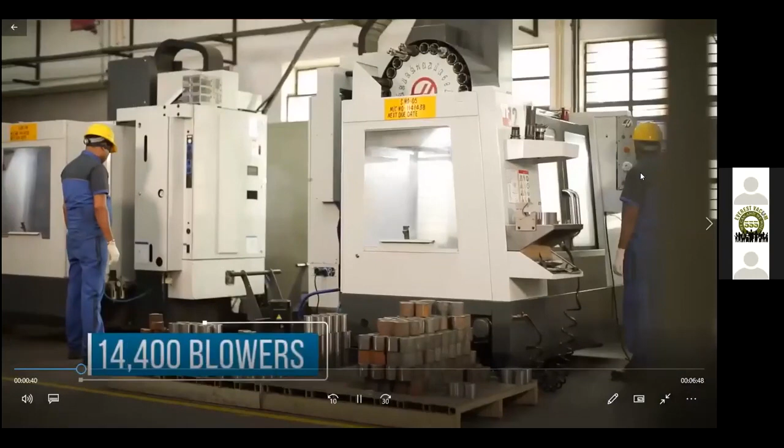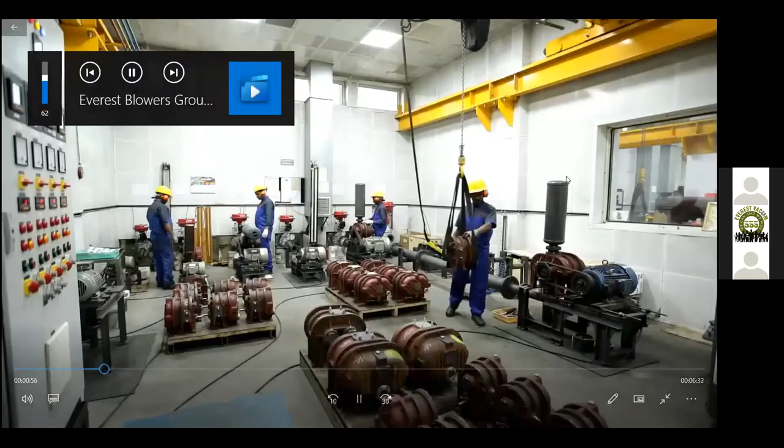This is the pressure division, ready to meet the future demands of twin-lobe, tri-lobe and turbo blowers globally. It is the largest manufacturer of roots blowers in the country and among the big names in all of Southeast Asia, providing a solution-oriented approach.

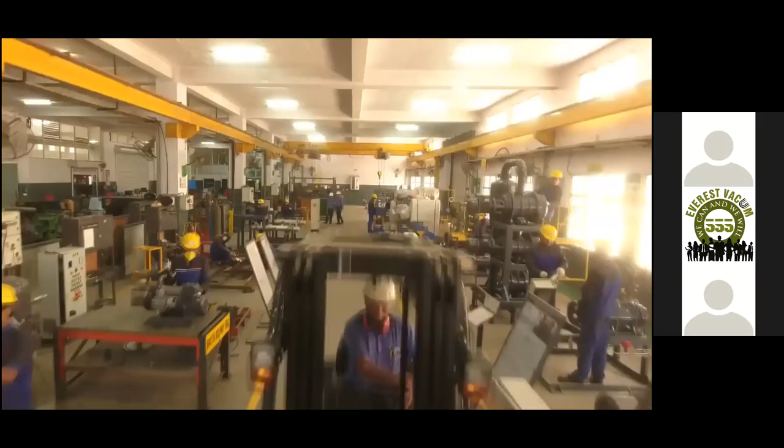In close vicinity is another facility with 150 plus employees. The vacuum division is the new and fast-growing company, the first and only Indian company to have successfully manufactured dry screw vacuum pumps in-house.

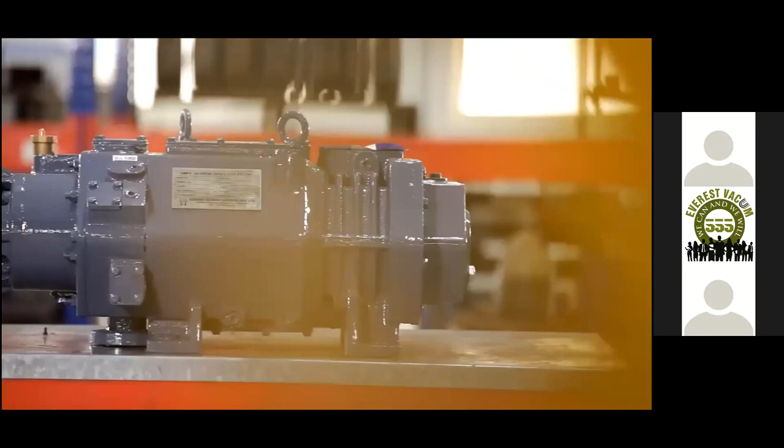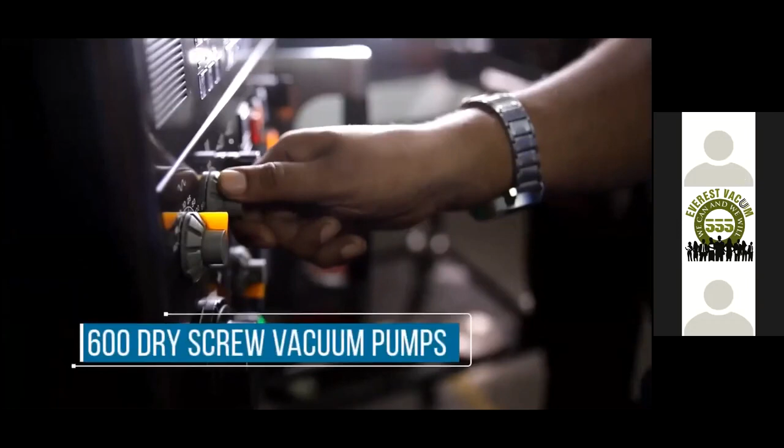Saluting the Make in India initiative, it has a current installed capacity to manufacture over 600 dry screw pumps per year with state-of-the-art, best-in-class mother machinery. Both these companies combine to form the Everest Group, a name synonymous with the world's highest mountain, the Mount Everest.

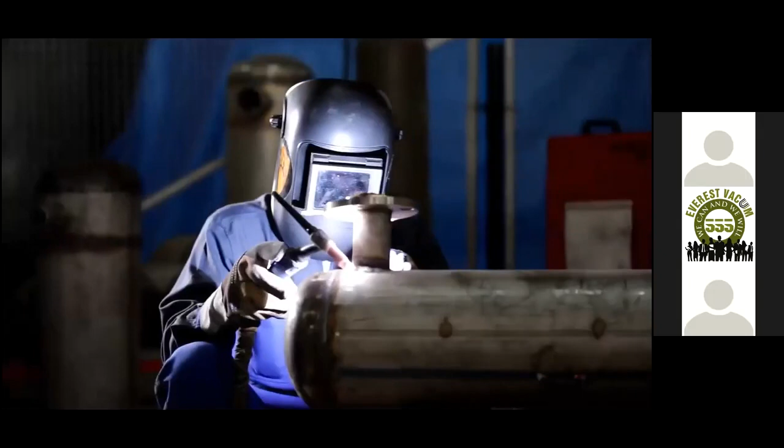Not just the same name, Everest Group has the same values too: to set benchmarks of performance, provide value for our customers, and to become the top solution provider of pressure and vacuum systems in Asia.

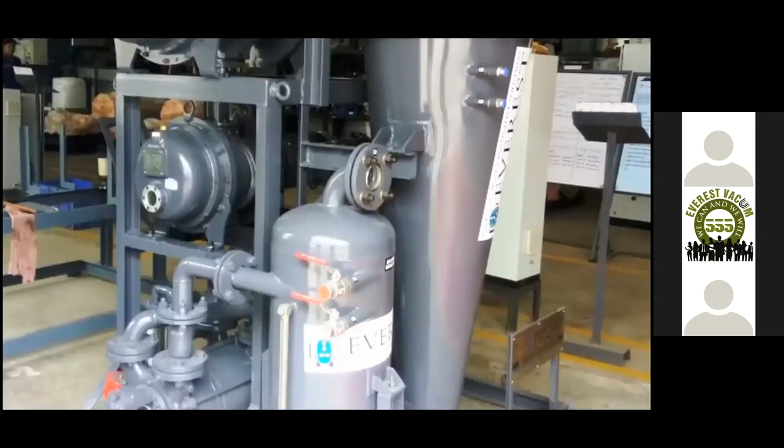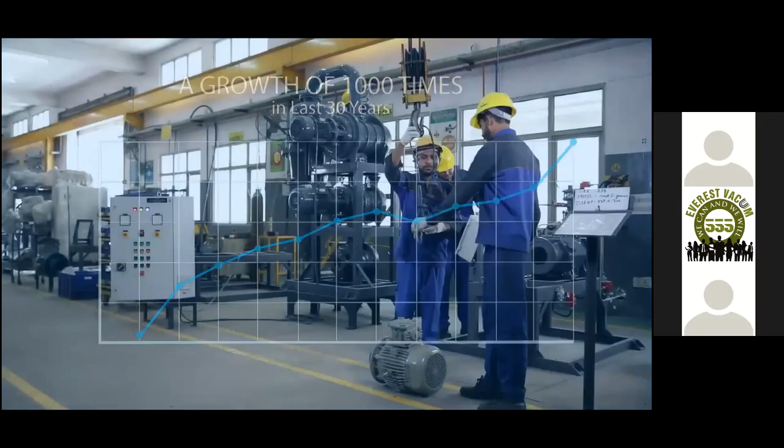The Everest Blowers Group, with its two divisions, has been scaling heights ever since its inception, becoming the largest blower and vacuum pump company in India. Since the early days, the Everest Blowers Group has been standing tall, towering above all other manufacturers of high-quality equipment in India.

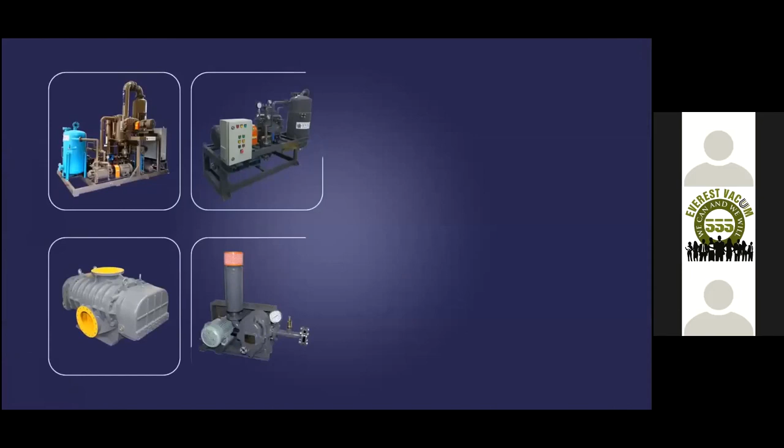For me, it's a business I've been doing for the last 38 years. I belong to a service background, with my father being a government lawyer. As an engineer by qualification and years of experience, today I am proud to steer one of the fastest growing high-tech manufacturing companies of the country.

I was fortunate to have hands-on experience in every department, from design to production, to sales and marketing, having sufficient exposure which has been used constructively towards the growth of the company. Supported by a pool of young talented Indians, we have always focused on a solution-oriented approach and application engineering, creating new markets for our product. This has given us an edge over competition.

Current economic indicators project a very encouraging image of India as a robust, fast-growing economy with least risks. The world is bullish on India, and so am I, on the growth of Everest. We have a strong succession plan with a highly competent second generation to carry on the mantle of Everest's growth and legacy. We wish them all the success.

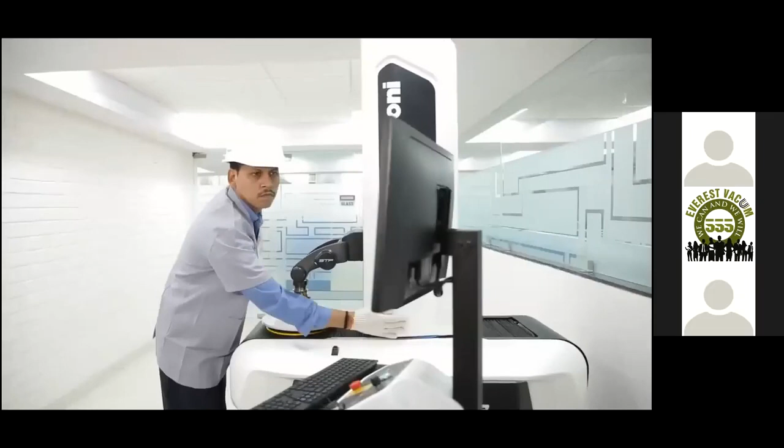Under the Everest Blowers Group umbrella, many world-class products are manufactured in both the pressure and vacuum divisions. In 1998, Everest Blowers Group went on to get its first ISO certification and also crossed international borders by exporting the products overseas. Over the years, Everest Blowers Group has made sure that it has abided by all industry norms through various certifications.

The Everest Blowers Group has been associated with many different industrial giants from different verticals, bagging prestigious orders from them. An innovative thinking and approach has made the company excel in many first-time achievements.

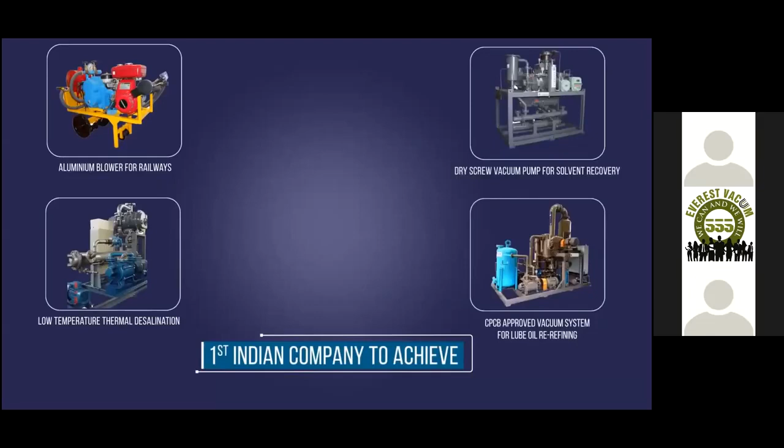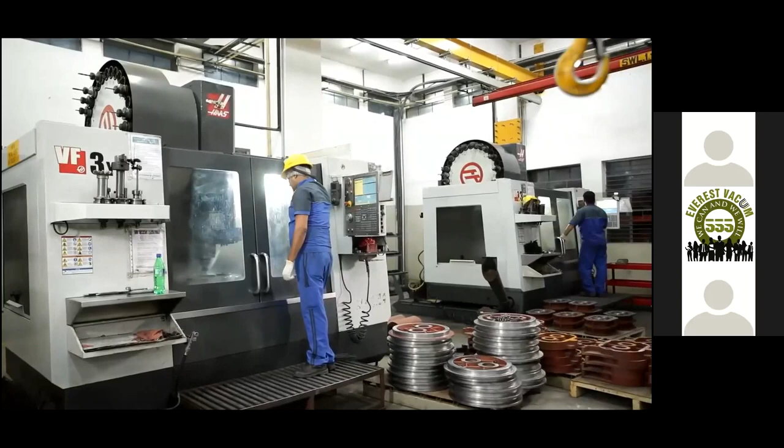Everest installed their first CNC machine in the mid-2000s and since then has increased the number of equipments to cater to the growing demand of the market. Everest started manufacturing their range of tri-lobe blowers as a more efficient alternative for reduction in noise and vibrations.

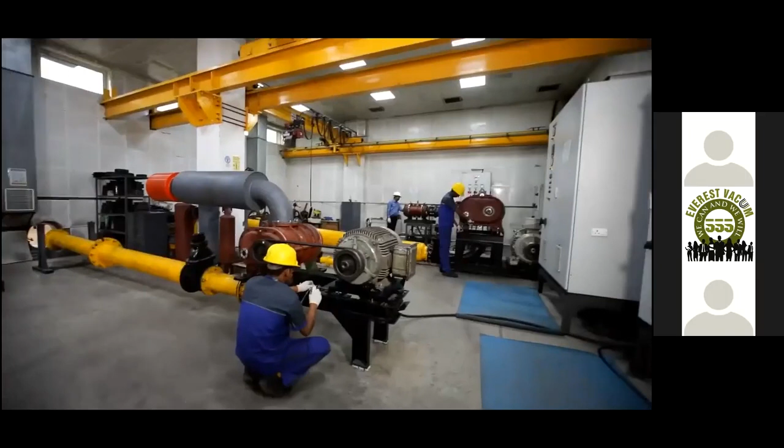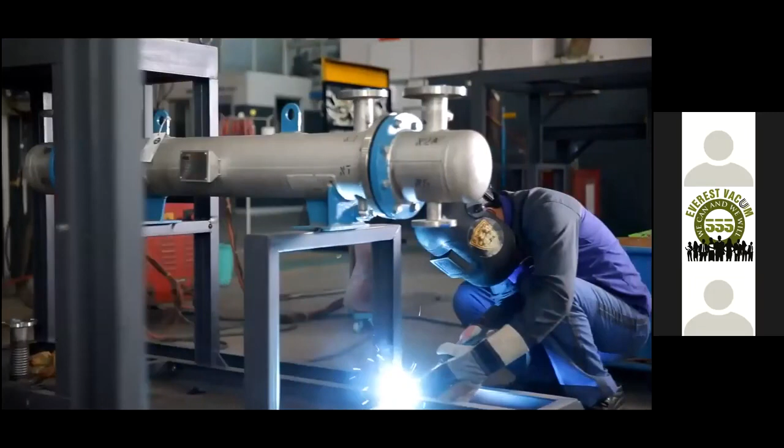The group has received accolades and admiration in recent years, touching the sky. The vacuum systems facility also started a dedicated unit to cater to the needs of complete skid-mounted systems requirements of our customers.

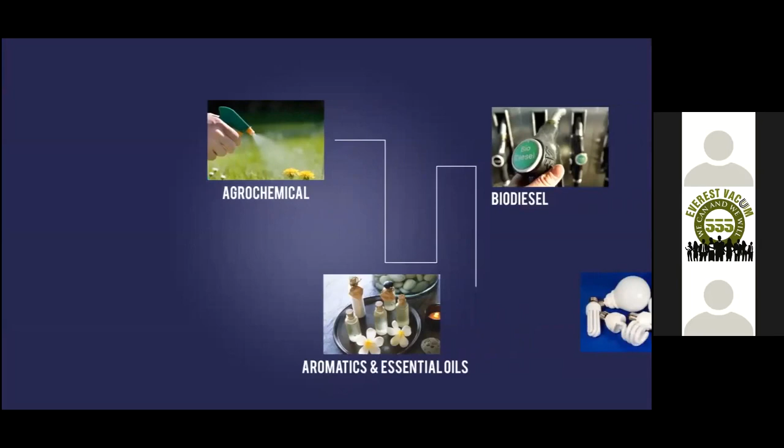The vacuum division is currently manufacturing around 350 to 400 complete skid-mounted vacuum systems annually, with a very wide industrial base spread across various applications.

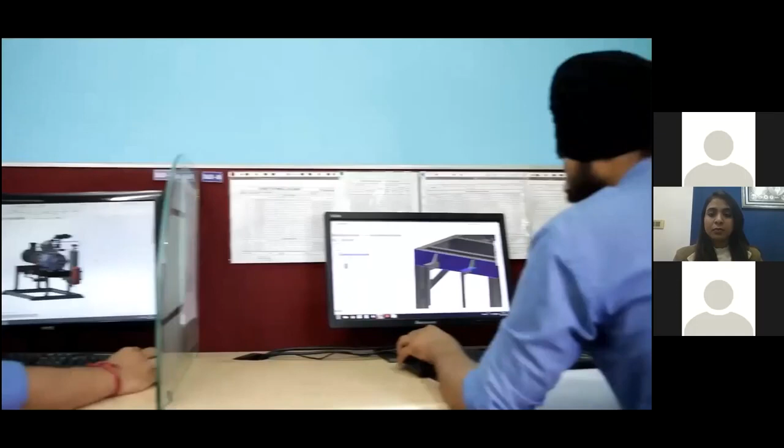The Everest Blowers Group is proud of its journey in scaling new heights and is in pursuit of excellence. We are following the latest industrial practices of Kaizen, 5S, and other lean manufacturing techniques.

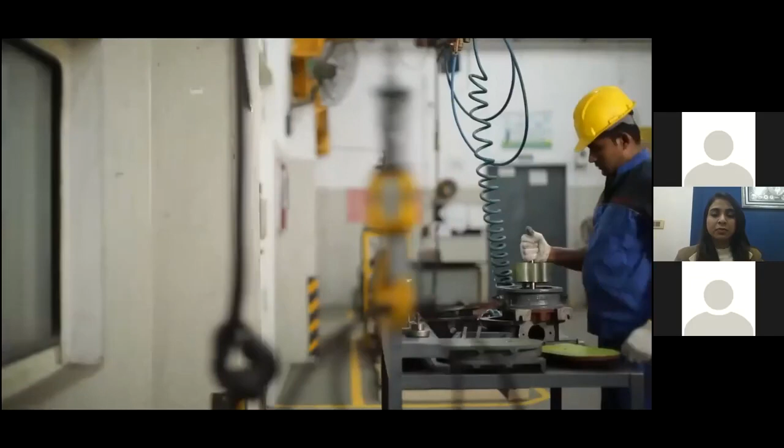To always remain connected with our stakeholders, we are available on all the leading digital platforms and have an online complaint portal, technical manuals, and a vacuum calculator.

It's been a little over 8 years since I've joined our family business, and we've experienced good growth with some diversification. I really enjoy what I do, as every day is a new learning of something interesting, helping us serve our customers better. So at Everest, we believe in very strong fundamentals of quality and innovation.

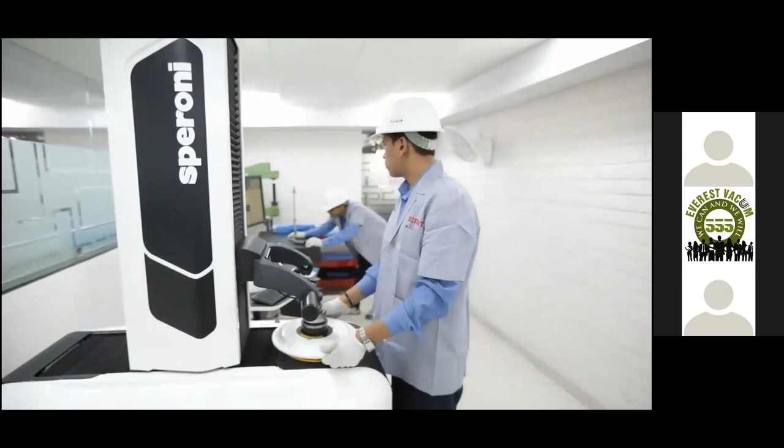We are the first and only company in India to have manufactured dry screw vacuum pumps, mechanical vapor recompressors, amongst many other products.

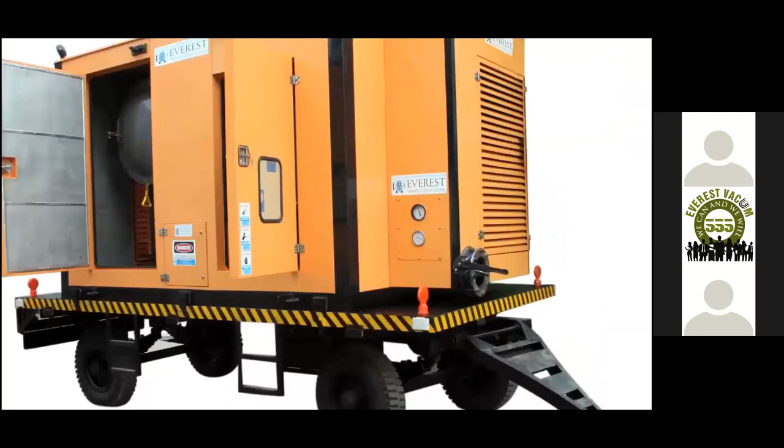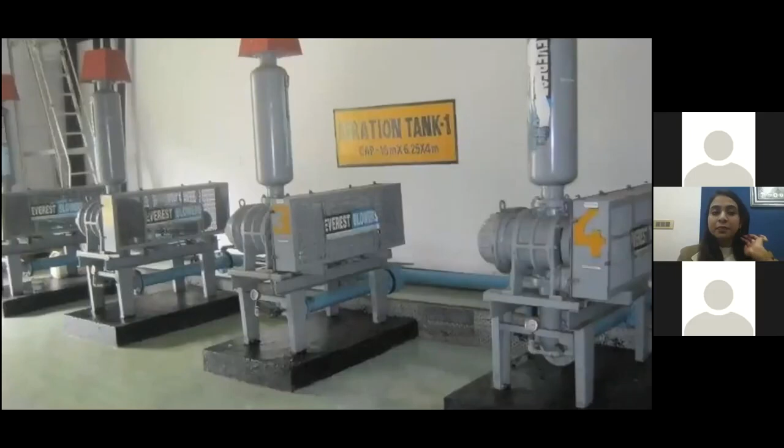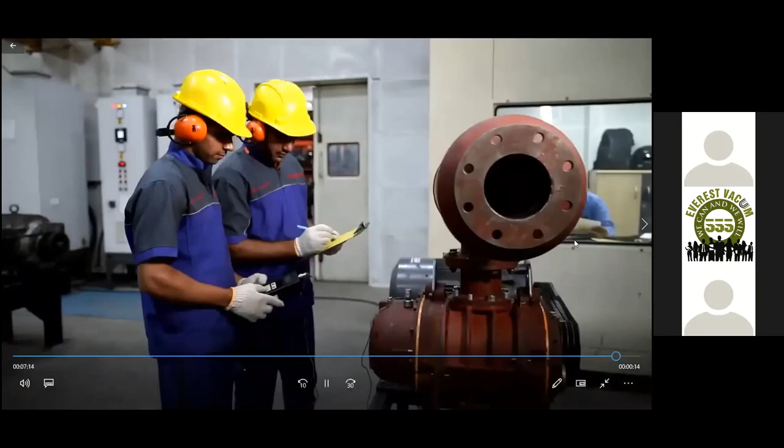With presence in the Indian market for over 3 decades and more than 150,000 equipments successfully installed, running in 38 countries worldwide, we are a trusted brand. Our vision is to further build and sustain a positive relationship with our customers, to have an innovative and motivated work environment, and to ensure a bright future for all our stakeholders. The Everest Blowers Group, standing tall like Mount Everest, reaching for the sky, now and forever.

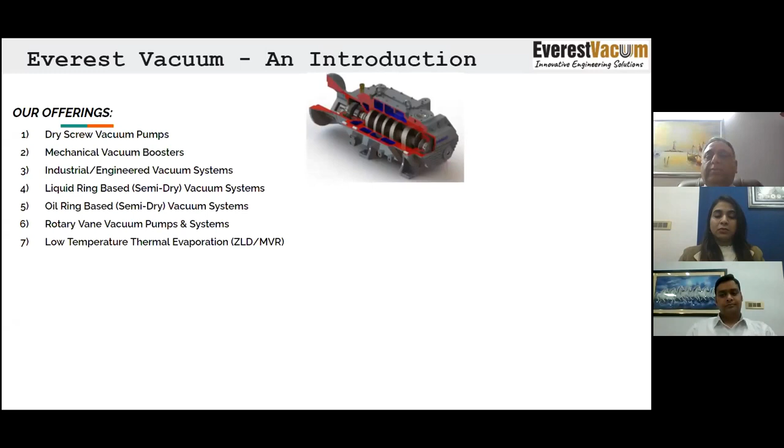Our promise to our customers is to ensure that we provide clean, reliable and sustainable vacuum, improve product yield through deeper and consistent vacuum, cost and space saving by right sizing, reduce batch cycle times, and in turn provide our customers with reduced operational costs.

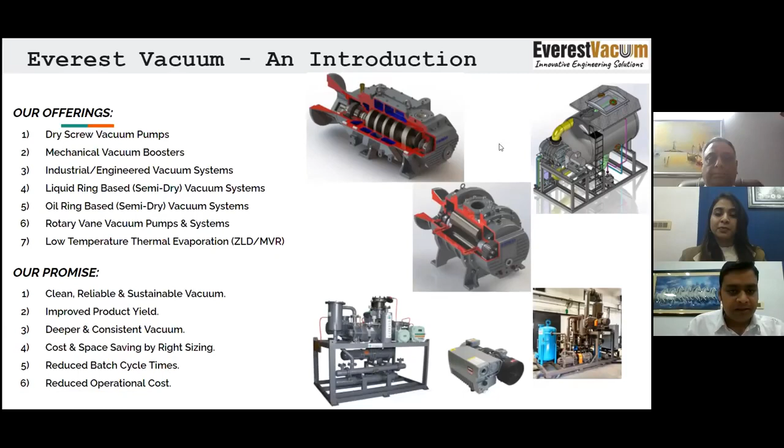So today's topic, as Chetna described, is high vacuum pumps for waste oil or used oil recycling process. As we are all familiar, waste oil is oil which has lost its properties as a result of use in motors, vehicles, electrical industry, chemical industries or process industries, wherever we are using them, and impurities get mixed with them like dirt, metal scrapings, water, or chemicals. This makes the oil lose its properties, and it is of no use until it has been recycled. So this oil has to be replaced with clean oil to complete the job.

So what is used oil? Examples of used oil include used motor oil, used hydraulic fluid, electrical insulating oil, transmission fluids, compressor oils, and cutting oils, which we regularly use in our day-to-day life. Most vehicles need lubrication for proper functioning and smooth operation, but this keeps depleting over a period of time and we need to replace it. So wherever this oil goes, we need to recycle it to make it fit for reuse.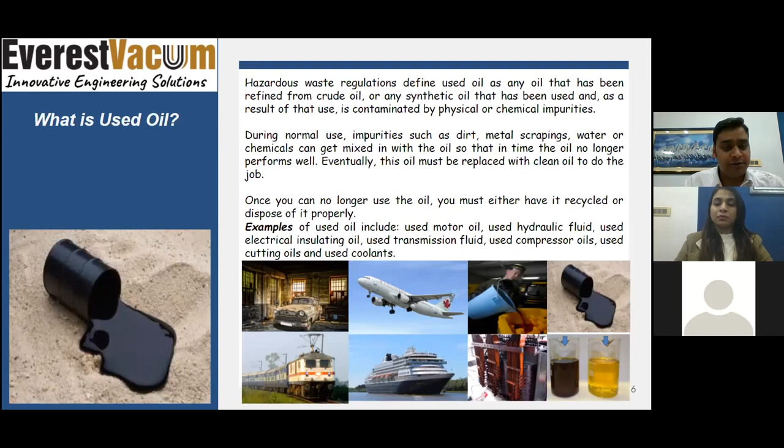So there are types of vacuum distillation we will discuss. There are two types: one is batch distillation, or direct distillation, and another is a continuous process performed with wiped film distillation method and thin film distillation method.

As most of us are familiar and already doing these processes at our premises, direct distillation is a process where we feed in the complete batch and then take out fractions from the waste oil. The fractions majorly include water, diesel, light lube and heavy lube. The remaining balance at the bottom is used, I think, for road making, as a bitumen component. So majorly people are doing it like this.

In batch distillation, you have limitations of heating, basically concentrated onto a particular section where it's not evenly distributed, which leads to extensive hydrocarbon cracking in the waste oil. This hydrocarbon cracking may lead to pollutants and gas generation escaping to the environment, which can create a pungent smell around the plant.

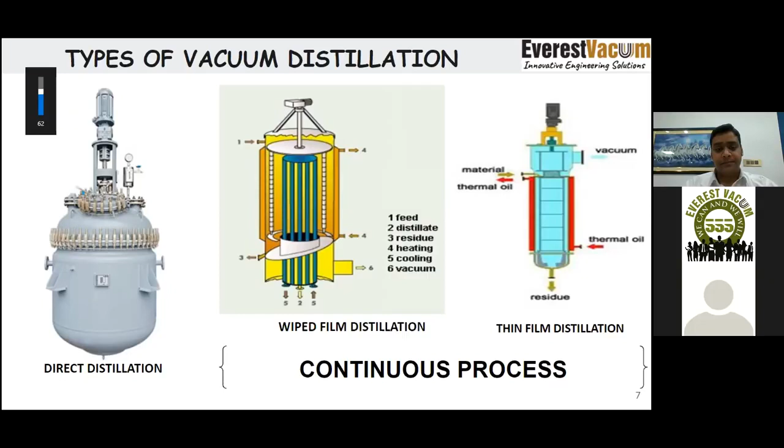The receiver, the process, the entire process - this is what we call the system volume - is connected to a vacuum pumping system, which helps in achieving the desired vacuum levels based on the process needs. We will elaborate more on the vacuum system in the coming slide.

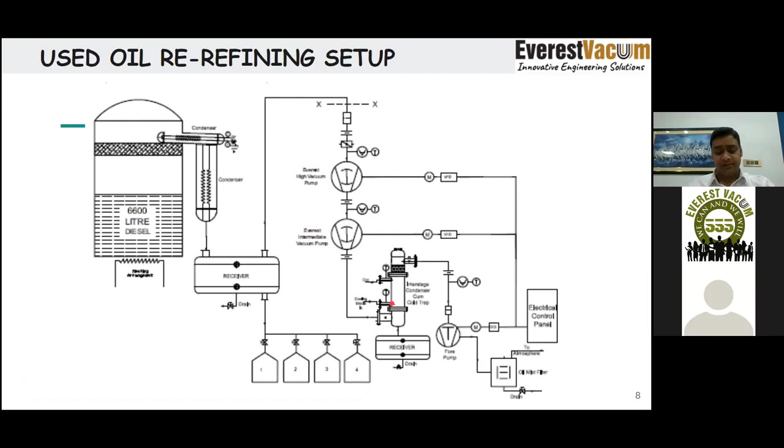So what is the role of the vacuum pumping system in re-refining? It helps you achieve a higher vacuum level, that is less than 1 torr absolute. It's a continuous duty operation. This vacuum helps in reducing the process temperatures in the range of 260 to 310 degrees Celsius.

In earlier days, people were distilling this waste oil under high temperatures, which led to charring in the waste oil, causing more hydrocarbon cracking and generation of effluents into the environment. By eliminating all these issues, we have reduced the process temperatures, increasing the quality of the product.

This reduced pressure, reduced temperature, high vacuum in the process, and also the correct sizing of the system help you achieve the desired batch time. So the process time has come down to between 6 to 8 hours from 12 hours. Now you can have an additional batch in a day.

These systems ensure 99% recovery due to the high vacuum, lower temperature, and the best evacuation that you are doing. So it gives you an ensured 99% product recovery.

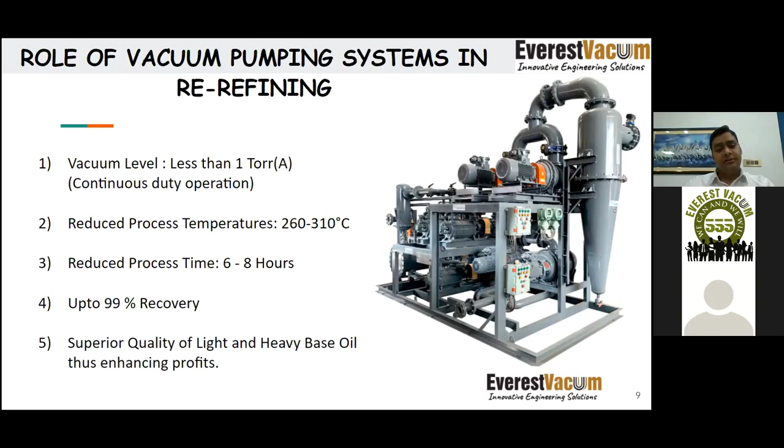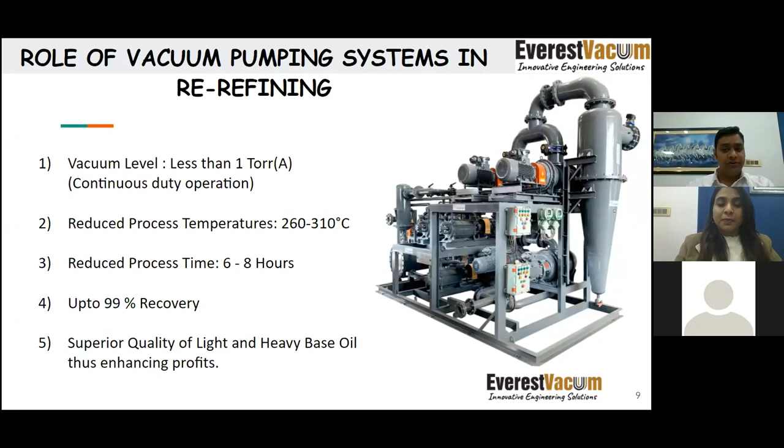With the vacuum, when temperatures are under control, you get to evaporate the light lube and heavy lube at a lesser temperature, which actually increases your production plus the quality of the oil, that is the color. So when you get a good color, the market price is obviously better as compared to any other manufacturer or refiner.

High vacuum pumping system - we'll take you through an introduction of what kind of systems we are offering and how they can be beneficial. Everest has its own milestone product called OilSyst. So on the left hand side, if you can see the system, we call this the OilSyst vacuum pumping system, a high vacuum pumping system.

As you can see, the pumps are coupled with mechanical vacuum boosters, a cyclone separator, and various other accessories in line for the process requirement. You can have 2 or 3 boosters based on the process speed or evaporation rate, which will help you re-refine in lesser time and handle heavy process carryovers.

The pumps usually have good sealing structures. We use mechanical seals which help prevent the flow of unwanted vapors into the pump or into the lubrication side, preventing issues and ensuring a longer life of the pump.

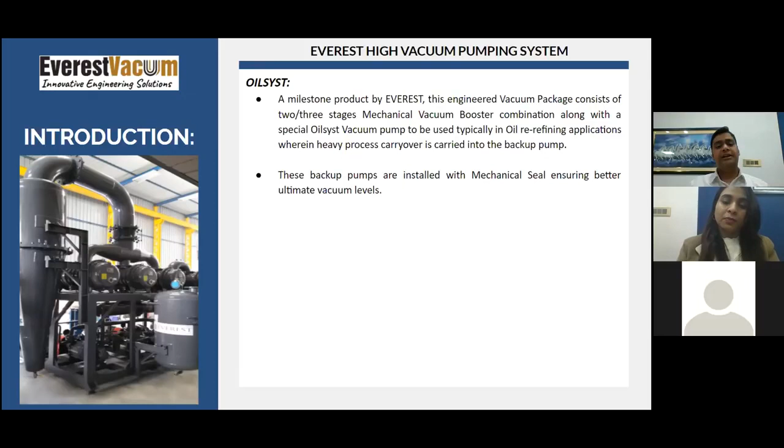The system, as I have indicated, includes the cyclone separator. Its purpose is to control carryovers inside the pumps and stop foreign particles from moving through, because waste oil includes a lot of impurities as we have indicated earlier. It can have metal scraps, cloths, threads, and various other things which need to be stopped before a vacuum pump. We also have an inline filter and a condenser to stop carryovers escaping from the pre-condensers or partial condensers, to improve pump efficiency, since during compression we need to maintain some clearances. So to not obstruct the operation of the machine, we use these filters and traps.

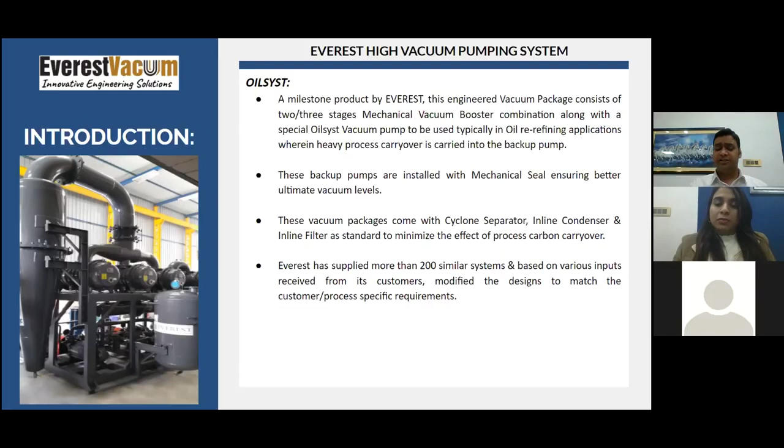Everest already has a wide range of suppliers all across the globe. We currently have more than 200 machines running worldwide. Majorly, we have market share in Africa, Middle East, and South America. We have very good customers working efficiently and enjoying the benefits in their processes with the quality oil they are getting.

With all these things, Everest vacuum systems are amongst the most technologically advanced iteration of the product available in the market. Our engineering team continuously benchmarks it against the competition and customer complaints to further iterate and improve on the design.

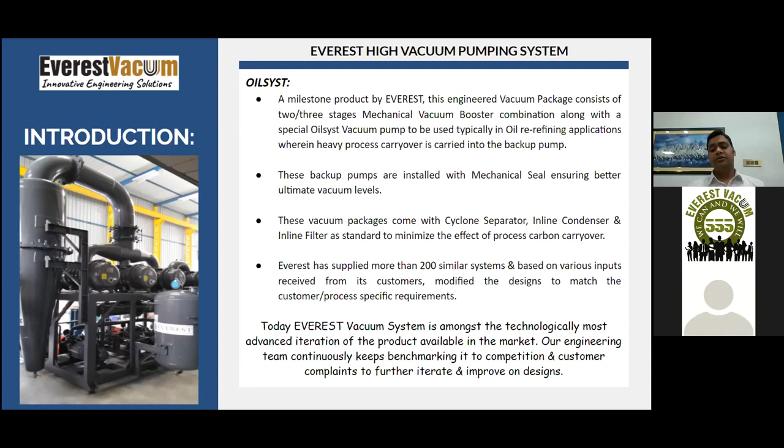Why use an Oilsyst? You are all aware of various kinds of vacuum pumps available in the market - oil ring vacuum pumps, liquid ring vacuum pumps, dry vane pumps, dry screw vacuum pumps. So why do we typically emphasize Oilsyst vacuum pumps? There are various benefits associated with Oilsyst vacuum pumps. First and foremost, they are easy to maintain and operate.

The systems are standard and optimized as per customer use, completely skid mounted, ready-to-use packages with all the safety interlocks we are offering. We have a dedicated and specially designed control panel to operate all these pumps, which can either be mounted on the skid, as you can see in the photograph, or connected in your panel room through a wire.

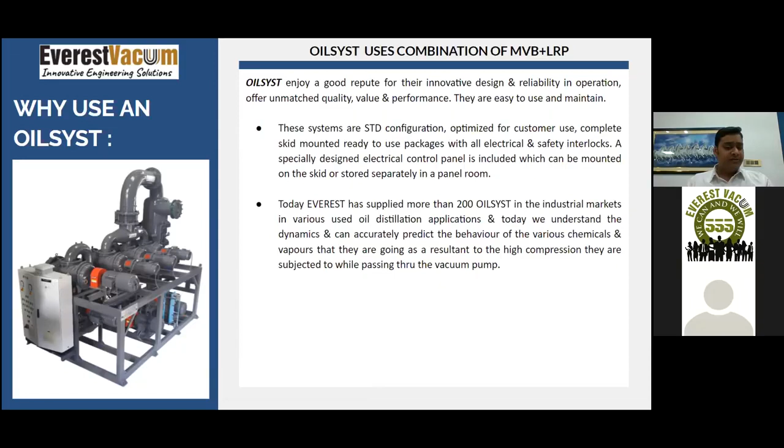We have already given 200 pumps as indicated, and this is not specific to the waste oil re-refining market. This includes all food processing industries where we have different media inside the pump based on the requirement of the industry. So these pumps are quite efficient in terms of offering vacuum. With these systems, we go up to a vacuum level of 0.5 torr absolute under blank conditions.

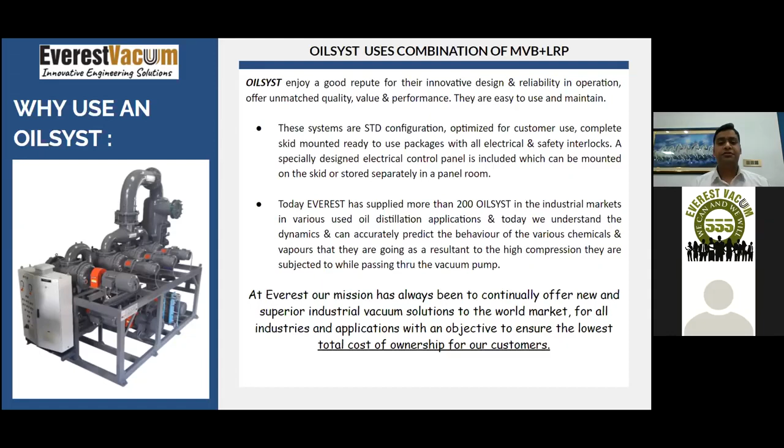As explained by Mr. Rakesh, our mission has always been to continually offer new and superior industrial solutions to the world market for industries and applications, with an objective to ensure the lowest total cost of ownership for our customers. At Everest, we are not only offering you a system, but also providing you solutions. Our aim is to understand and analyze your processes so we can provide you with the correct improvements and resolutions with our machines.

These pumps, as explained, are Oilsyst vacuum pumps being circulated with oil. The oil can be your base oil as well. This is the major advantage - whatever you are refining is actually offering you a benefit in operations by utilizing your own source that you are creating.

We have very good limited controlled power connections with our systems. We utilize the efficiency to the fullest. We follow engineering practices and operate under permissible RPMs and frequency of the site.

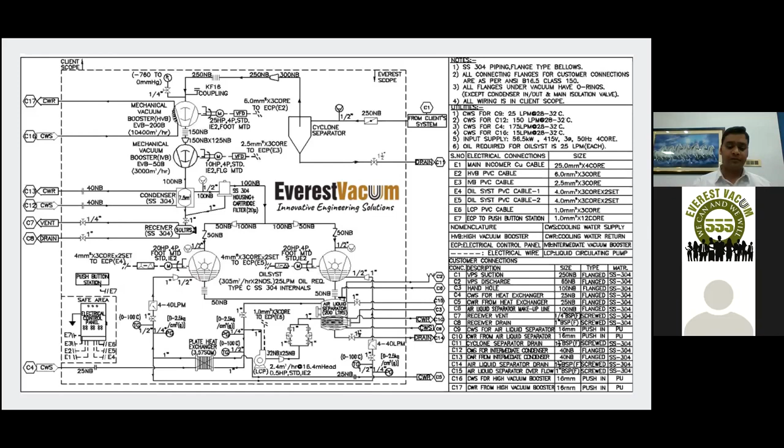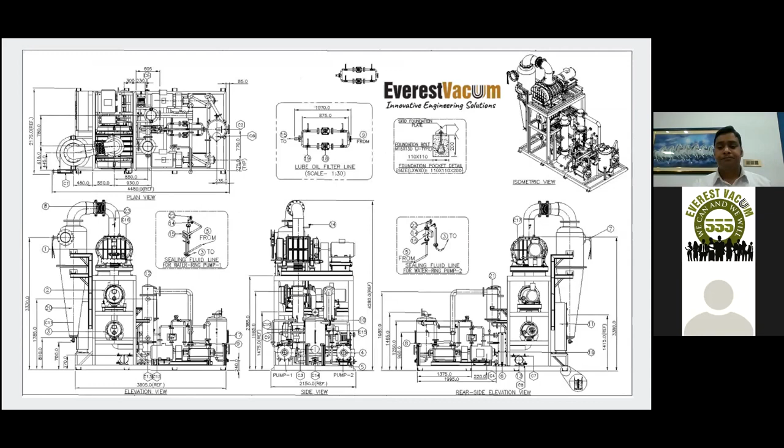As we keep on going, the evaporation of water mixed with diesel starts at around 160 to 180 degrees Celsius. This is the lightest portion and the lowest boiling product in your waste oil, which starts getting evaporated at a considerably low temperature compared to previous atmospheric conditions.

You also get a good recovery of approximately 12% diesel, in the range of 180 to 215 degrees Celsius under operation. So your diesel comes out early, which helps you in maintaining the quality of your light lube and heavy lube. Because if the diesel doesn't come out completely, the light lube cannot be separated out of it.

So you go on to the light lube section at a temperature of 215 to 265 degrees centigrade. This is the major advantage where you earn major benefits, because if this section gets completed early, the most expensive and best part - the heavy lube - comes out, which we are actually completing below 300 degrees centigrade.

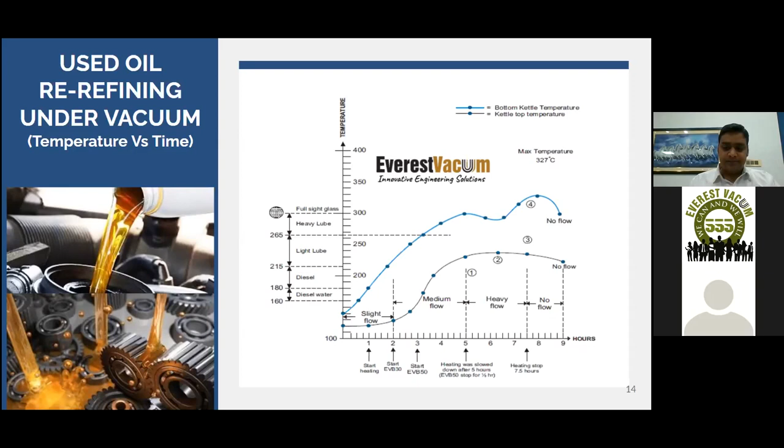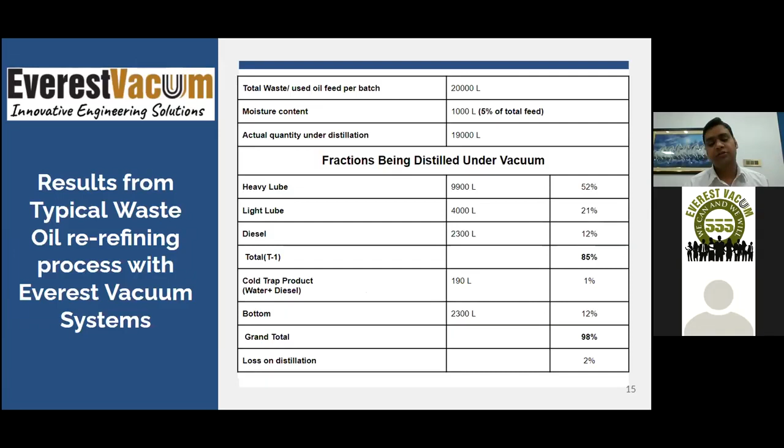The results from a typical waste oil re-refining process with Everest vacuum system. Now we will take you through a typical example of a refinery where the practical study has been made with our vacuum systems. This table shows how much feed per batch we have taken - it is 20 KL, 20,000 liters.

The moisture content present in the total feed, we count as 5% usually. So the total actual quantity coming under distillation is 19 kL, 19,000 liters. The fractions being distilled under vacuum: heavy lube is almost 52%, equal to 9,900 liters; light lube, 4,000 liters, balancing out to 21% of the total feed under distillation; and diesel, 12%, coming out to 2,300 liters.

In case you have any other fuel component in the waste oil, that can be treated under this table, but the percentage will remain and vary between 12 to 14%.

So the total is approximately 85% of the major fractions of the waste oil. Now, regarding the trap, what we offer is an interstage condenser and trapping unit. What you get out of it is water plus diesel, which is almost 1% of the total product that you're processing under distillation.

Obviously, the process of waste oil includes the bottom coming up. There will always be some residue remaining. What we observed is 12% will come out as bottom, that is 2,300 liters, equal to the quantity of diesel. This bottom is used in various road making activities, in charcoal or bitumen manufacturing, and as a building substitute in some countries. People also use it for fixing and sealing in industries and household projects.

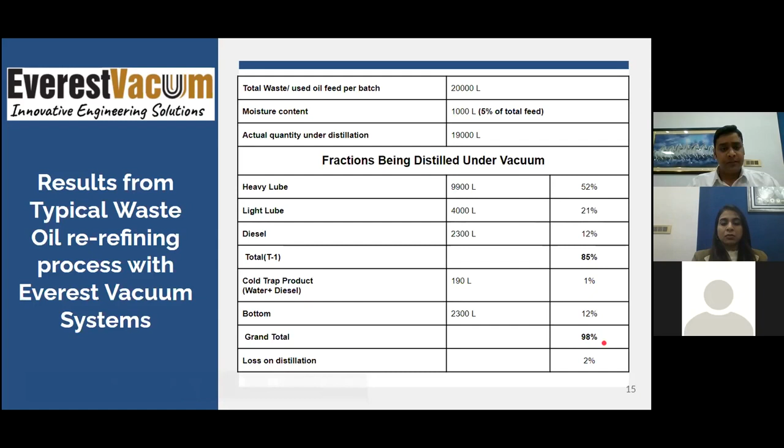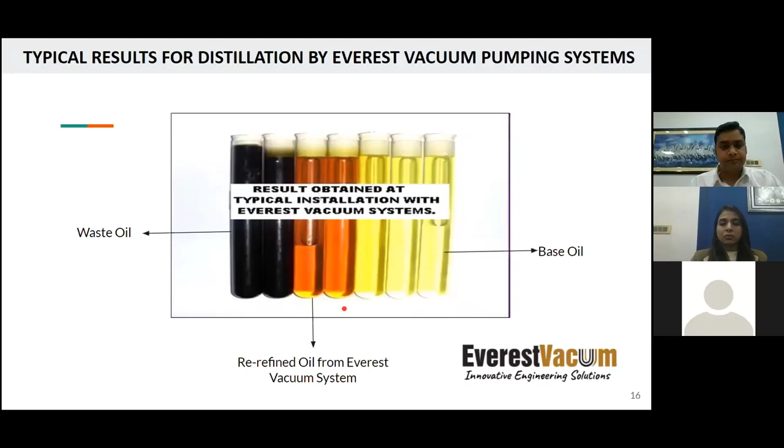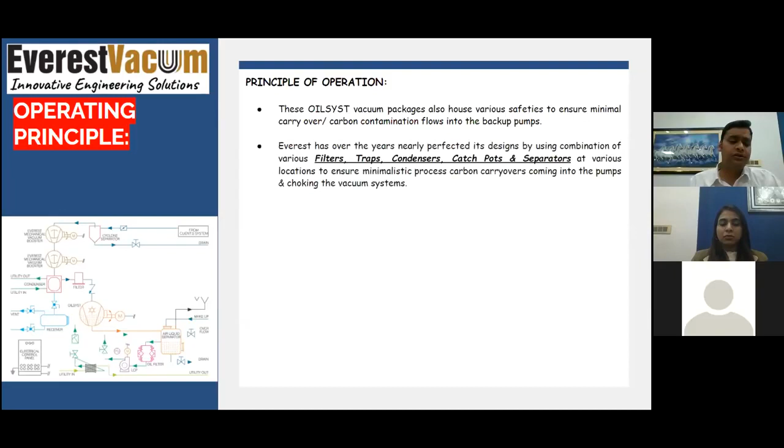Taking you to the operating principle of the vacuum system, we offer these systems with various safety interlocks. We have control on carbon carryover of vapors into the process or the vacuum pumps. With this, we offer various filter traps, condensers, catch pots, and separators, as we've explained. We have various safety provisions and interlocks into the systems, leading to better efficiency of the vacuum pumps in the process.

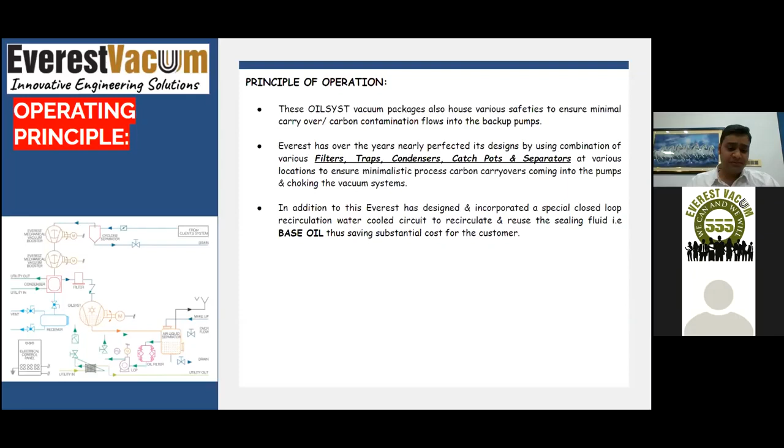In addition, we have designed and incorporated a special closed loop system. As I told you, the sealant fluid inside the liquid ring pump is used, recycled, and reutilized back into the pump to a certain limit. The main advantage is recirculation, a water cooled circuit, and reused sealing fluid, which is the base oil. Whatever circuit you have, you can use sealant fluid as your refined base oil. So it's a continual cycle.

You don't need to invest in anything else like water, glycol, or other media inside the pump. Use the same oil that you're re-refining, and once it's contaminated, feed it back into the re-refining vessel. So you're actually making it a closed loop cycle, saving significantly on operation cost.

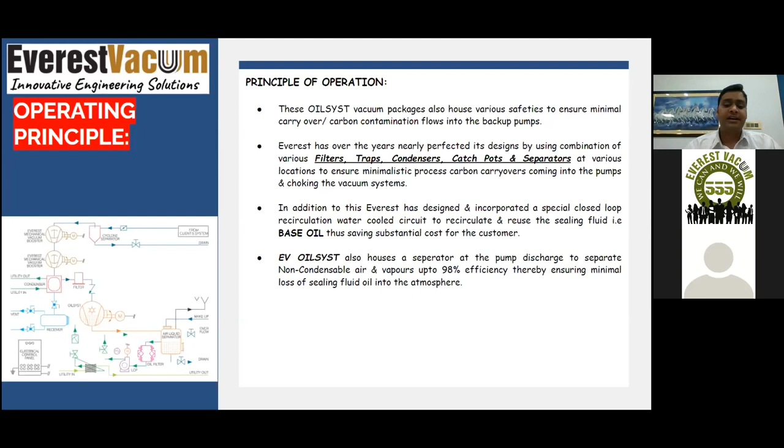We have a separator at the discharge end before we recirculate this pump, which ensures 98% efficiency. The vapors and air get separated out, and only limited flue gases move out to the environment, giving you 98% recovery of the sealant fluid as well.

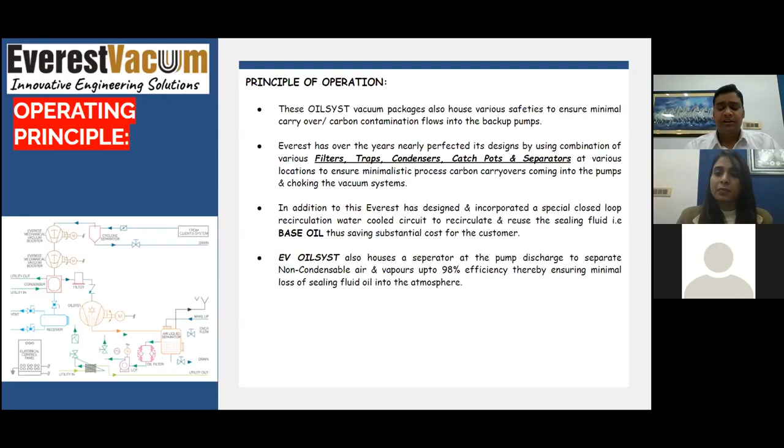As I've told you, these systems are very popular among waste oil re-refining applications. But besides this, we cater to various industrial segments including chemical, pharma, food, and general vacuum applications, such as pick and place and other transferring purposes. If you replace the oil part of the sealant with glycol, you can use the same machines in the food industries.

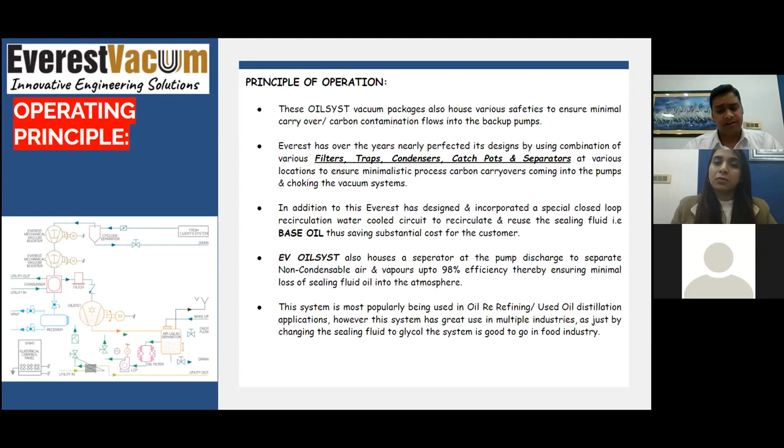So as we discussed earlier, why use an OILSYST? Because of the provisions we use, the OILSYST consumes the same sealant fluid. It gives you recycling of the same sealant fluid, reutilizes the filters and other things, and helps stop carryover inside the pumps. The suction capacity with oil circulation is better inside the pumps, giving you a good vacuum level compared to other liquid ring or oil vane pumps. It offers a vacuum level of around 20 torr under blank conditions.

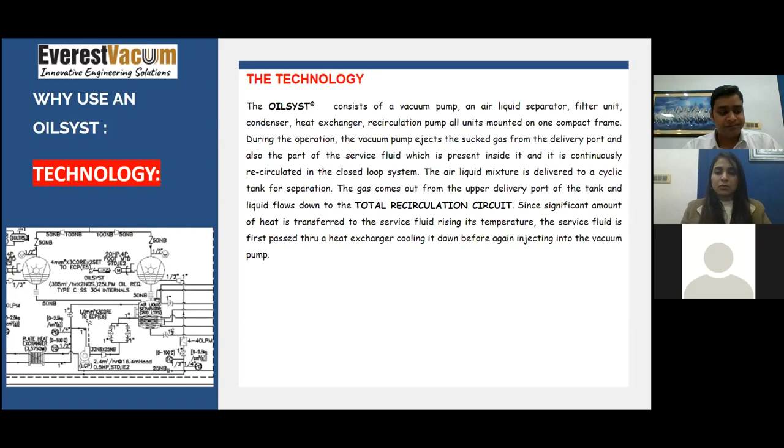As we have a recirculation system here, there is no need to top up the sealing fluid inside this complete setup. Your sealing fluid is getting recycled again and again, offering you a good operational cost saving. No investment required, nothing. Thus, these systems are termed semi-dry systems.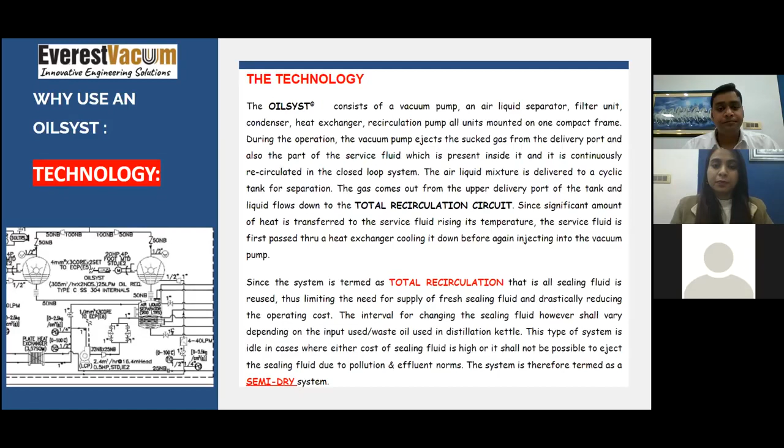Now we'll take you through the typical problems in a conventional wet waste lube oil re-refining process. You must be familiar with the types of vacuum systems from older times, including jet ejector systems, liquid ring vacuum pumping systems, water jet systems, and then coming on to oil seal, semi-dry and dry systems.

In jet vacuum systems, you must have noticed there are a lot of accessories to maintain. There are a lot of fluctuations in the vacuum, in consistency, in displacement, and many other issues, which we'll take you through in this slide.

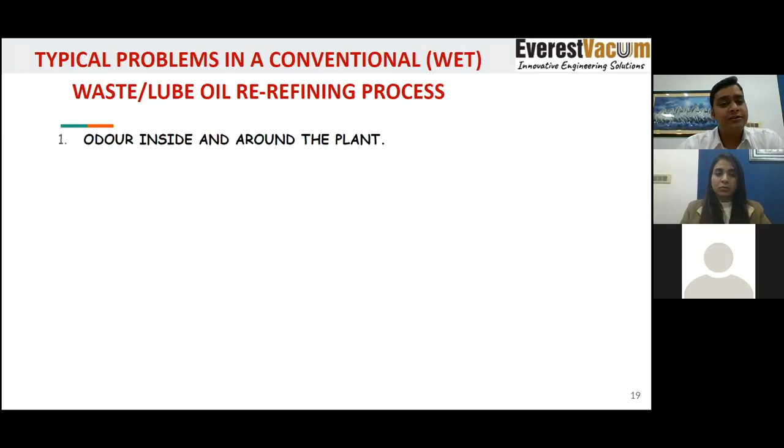The first and foremost issue is odor inside and around the plant. Once we overheat any of the product being fed into the kettle, it leads to charring and hydrocarbon cracking, which increases the pungent smell. This surrounds the complete plant and the area around it, leading to hazardous gases moving in, people getting affected, and a lot of restrictions by the pollution control bodies, ultimately damaging your production focus and productivity.

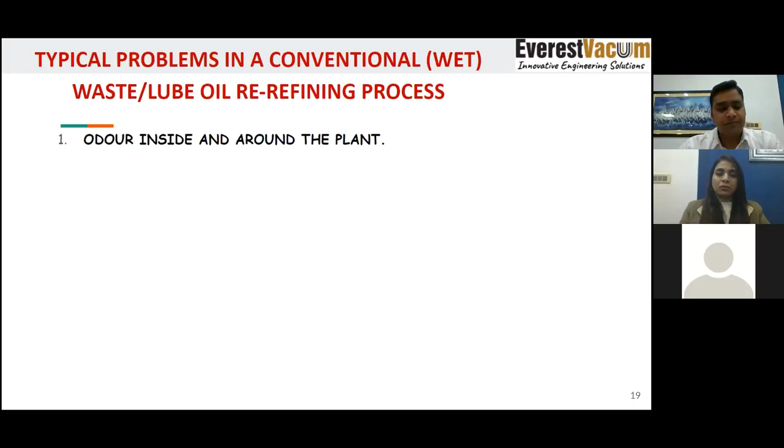Second is disposal of hazardous waste, slurry and toxic material. You must have gone through this phase when we used to extract these heavy lubes and light lubes using acid clay treatment. This acid clay treatment used to happen in all countries earlier, but now it's banned in almost all countries due to the toxicity of the disposals. Ultimately, whatever waste comes out needs to be dumped into the ground—there's no other way to flush it off into the seas or rivers.

This disposal of hazardous waste is now eliminated because you are reducing the process temperatures and getting a recovery of 98%. This helps you get everything out without needing to incorporate any third extracting media to remove these materials—it's all handled by our vacuum pumping system.

Excess carbon carryover into the pumps is quite related to the second point. Since we are operating in high vacuum and low temperature ranges, carbon cracking does not happen, so we save on carbon carryover, which enhances the life of the machines performing the vacuum generation.

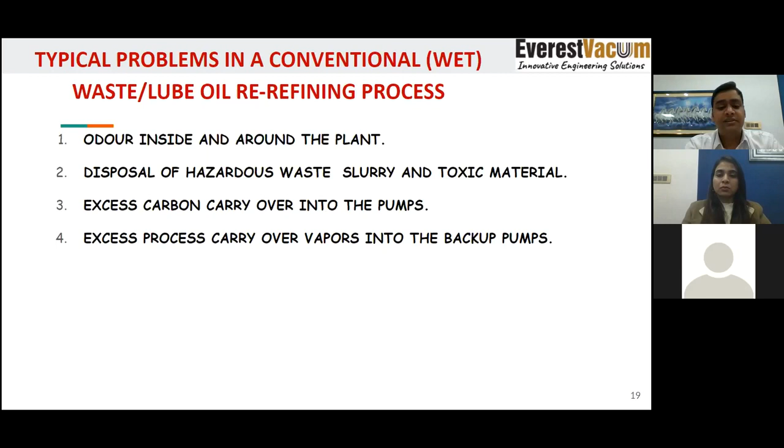Excess process carryover vapors into the backup pumps: earlier, when we were doing these distillations using conventional methods, the process carryovers were more because we weren't able to gauge the exact capacity requirement, the displacement of gases, and the vacuum requirement. Similarly, we weren't able to size the pumps because we weren't aware of the gas flow. So we couldn't condense all the gases that excessively came into the vacuum pumps as carryover, leading to loss of product in the process.

Process vacuum variation during operations: all these steam ejectors and water jet ejectors are entirely dependent on some fluid, mainly steam in ejectors and water in water jets. These have properties that fluctuate based on their backup supply. Sometimes steam is required in some other section of the plant, so it gets shifted to that location, resulting in lower pressure and quantity, causing fluctuations in vacuum and displacement. These can be maintained well in the plant, but the operators have no control over the figures fluctuating in the ejectors. This is one of the obsolete processes that everyone is now moving away from, given the steam cost and PCB norms.

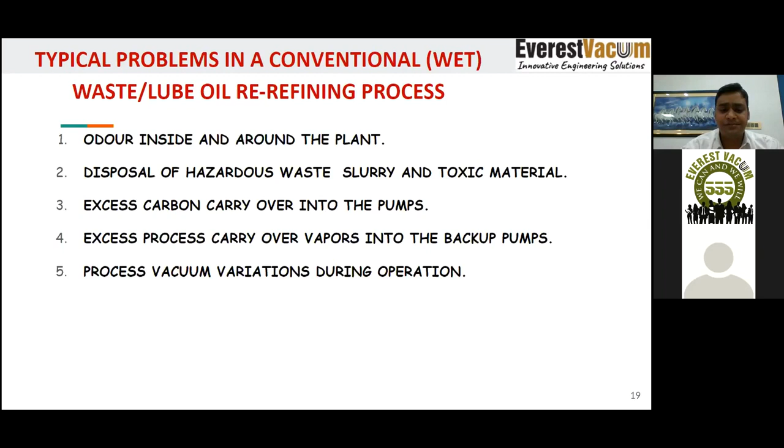High maintenance in old systems like steam ejectors and backup pumps: while these systems don't have moving parts, they do have connected accessories and equipment which help generate steam or circulate water. If these fail, the maintenance time and cost will be incurred heavily onto the complete setup.

High process cycle time. Since we are unable to size and gauge the vacuum requirement, we were not able to control the process cycle time. With our mechanical vacuum pumping systems, you get to understand what actually you need in your process, how much vacuum is required, and what condensation media you should use in your condensers along with the size of the condenser, so that you get maximum output of your product within a limited, controlled time.

Complex sequence of operation. Opening up one ejector after another, then a third ejector, controlling the steam flow everywhere, opening the valves, closing the valves, partially opening the valves, leads to a lot of complex sequences of operation. Sometimes we miss out on something and it leads to damage in the process, with complete batches going off of production. It is actually very troublesome maintaining these kinds of operations in earlier days.

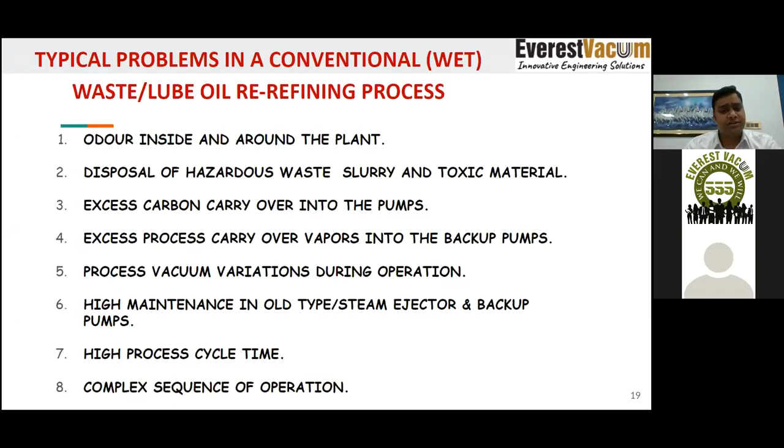So this is the cost benefit analysis after we have discussed the vacuum system and the process so far, based on the same case study we showed you earlier. The process is waste oil re-refining, with distillation under vacuum. The pumping capacity we are offering here is 10,400 meter cube per hour. The vacuum in the process is 0.5 torr absolute. The vacuum system we have nomenclature here is Oilsyst 2.5, and the old type of system we are comparing it with is a 3-stage steam jet ejector.

As you can see, the power and steam cost in a wet system, that is the ejector system, is almost... I'd like to indicate that the figures we are discussing here are all in Indian rupees. For dollar conversion, you can divide by 75, as the current rate is about 75 against the Indian rupee. In other countries, you can choose the respective currencies to convert as per your ease.

So in power and steam cost, we are almost making 85 lakh rupees of operation cost. The cooling water utility cost is 1.22 crores because we have huge condensers over here and a huge water requirement. So the cost of water is extensive in these wet systems.

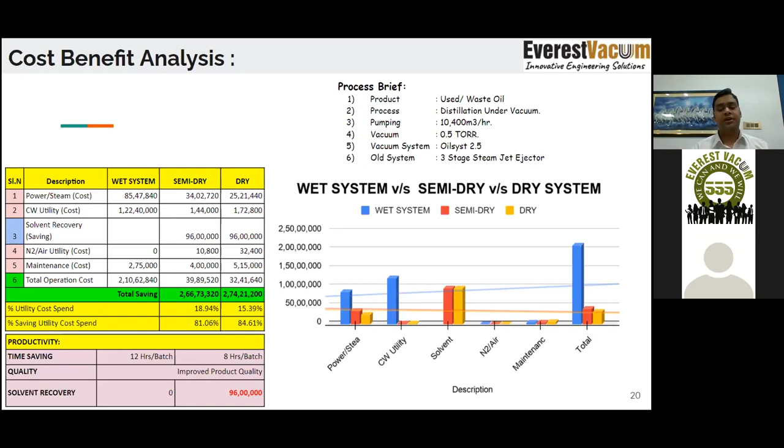Solvent recovery: whatever products we have discussed, diesel, lube oil, light lube and heavy lube, all these fractions of the waste oil are being recovered in Everest vacuum pumping systems, be it semi-dry or dry. So we give you approximately 1 crore rupees of savings in recovering the solvent. This cost has right now been considered only for the diesel.

So you can see the graph, it is self-indicating that the wet systems are consuming very high operation cost as compared to the Everest vacuum systems of semi-dry and dry.

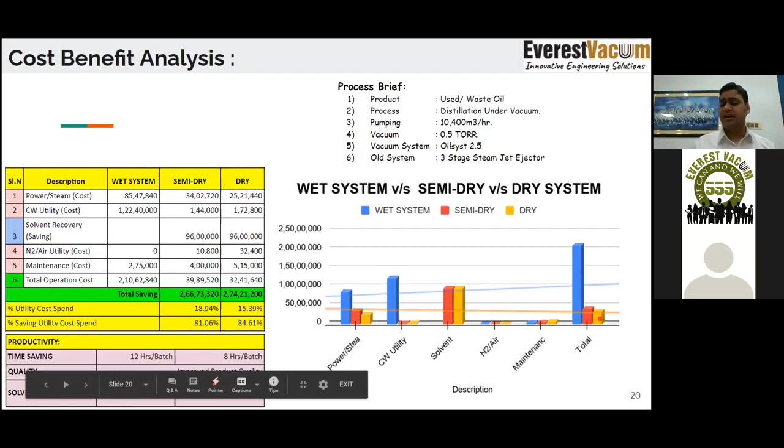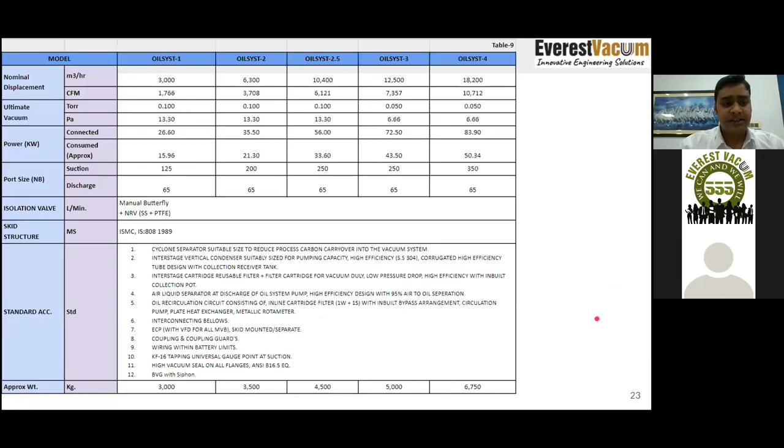So gentlemen, these are some of the models that we have standardized in our vacuum pumping system range. We have Oilsyst 1, 2, 2.5, 3, and 4 — 5 systems standardized, and the displacement capacities of each system are 3,000, 6,300, 10,400, 12,500 meter cube per hour, and 18,200 meter cube per hour.

The systems are very compact and include all standard accessories needed to make them run efficiently — the cyclone separator, interstage condensers, interstage cartridge reusable filters, air liquid separator, oil circulation circuit, piping, bellows, ECP, coupling guards, and everything. So it's a fit, plug and play unit, I'll say. You just need to give us the process connection and the electrical wirings, and we can run the machine immediately on site.